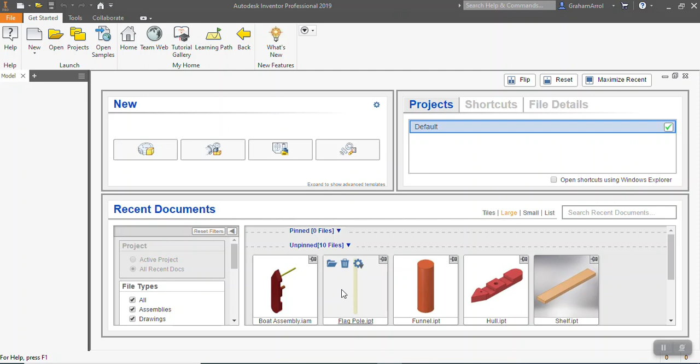So I'm going to start by doing File, New, and as I always do, I make sure that it's selected to Metric, and then I'm going to click on Standard Millimeter Inventor Part File.

Once it opens up, we're going to start a new sketch, and I'm going to use the horizontal work plane here to start my sketch on.

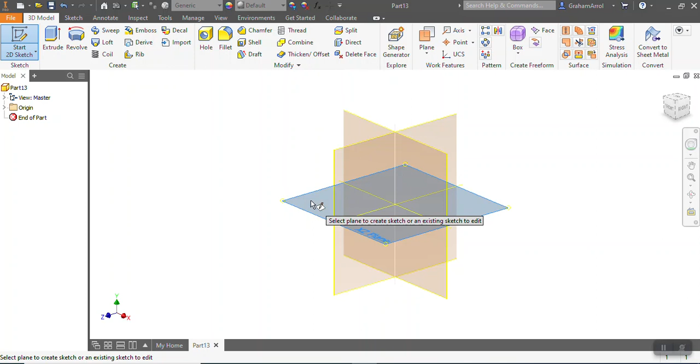The first thing I'm going to do is draw a rectangle. So I'll click to say I want to start the rectangle, then drag my mouse to the finishing point and click again.

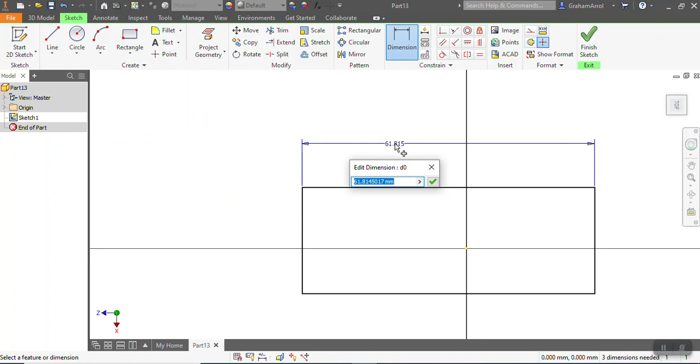Now I'm going to dimension it to the size that I want by using the dimension tab at the top here. I click on the line I want to dimension, and I'll now have a size attached to my cursor. I click again, and type in the size I want, which is 200, and enter.

It'll have zoomed out and made it bigger so you can't see it. With the roller on your mouse, you just roll away from yourself and the model will come back into your screen. I'll dimension the side here, that's meant to be 40, and enter. And that's got the overall sketch done.

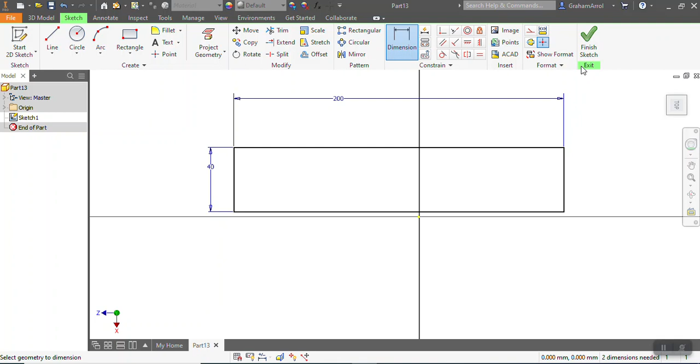As we've always done, once you've got the sketch done, you finish sketch, and then we're going to extrude it to give it a height. So I'm going to click on extrude and give it a height of 20 in the extrude, and OK.

This is like the little block of wood that you were given at the start when we did practical woodwork, and you then made the boat from this. So the first thing we're going to do is try and cut out the two little recesses in the boat.

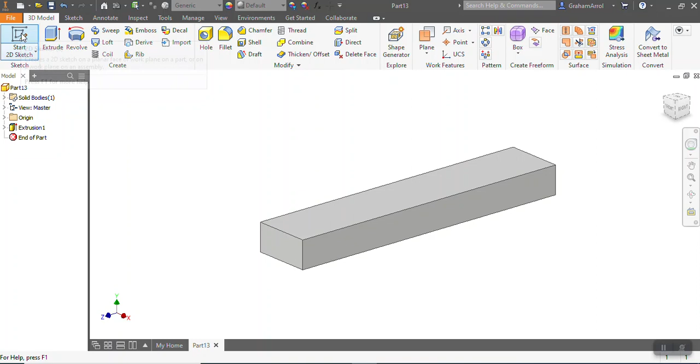I'm going to start a new sketch by clicking on the top surface, and then draw two rectangles. The important thing here is that the rectangles start on the top edge and go down and finish on the bottom edge. I'll do the next one the same way, starting at the top edge and finishing on the bottom edge.

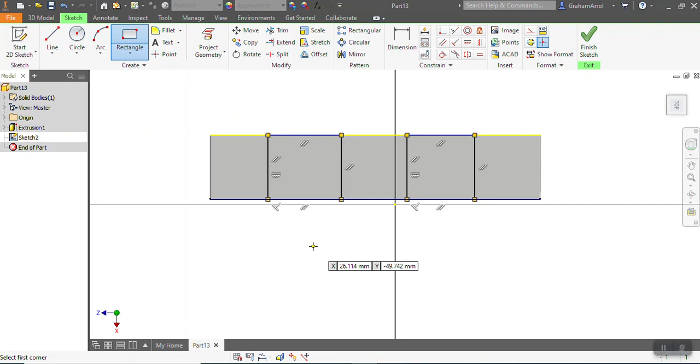Now I'm going to dimension those rectangles. I'll dimension from the front edge by clicking there first, then move to the edge and click again, and I want that distance to be 50. So I'll type in 50, enter.

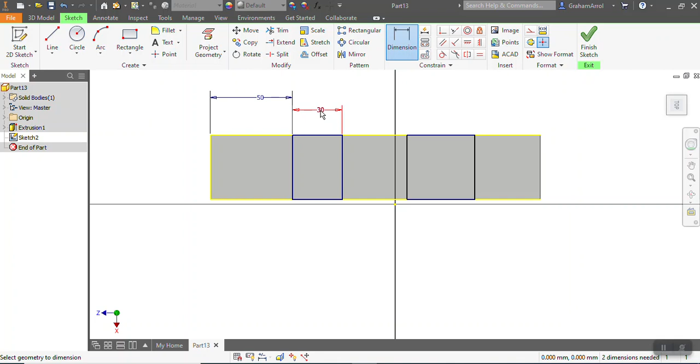Then from the edge to the edge of the first rectangle is going to be 30, enter. And then from the first rectangle to the second is going to be 40, enter. And lastly, the width of the second rectangle is back to being 30, enter.

Once we've done that, we've finished the sketch as usual, and we're going to extrude.

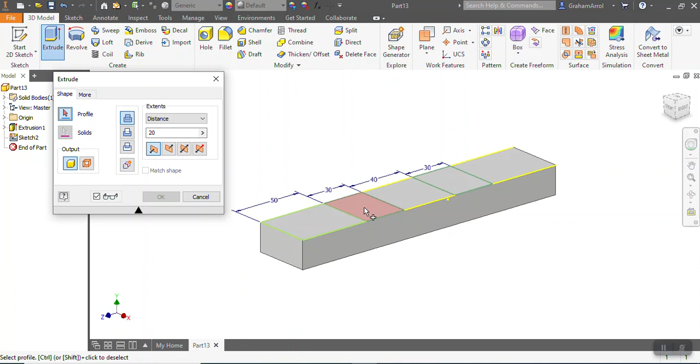Now, first of all, it hasn't selected either of the rectangles. I've actually got to click inside the rectangles to select them. It's trying to join them on at the moment, because this is the join option.

I'm going to do cut instead, which is going to take them away, but I only want to go through halfway, so I'm going to set the distance to 10 and OK. And that's me now got my two recesses into it.

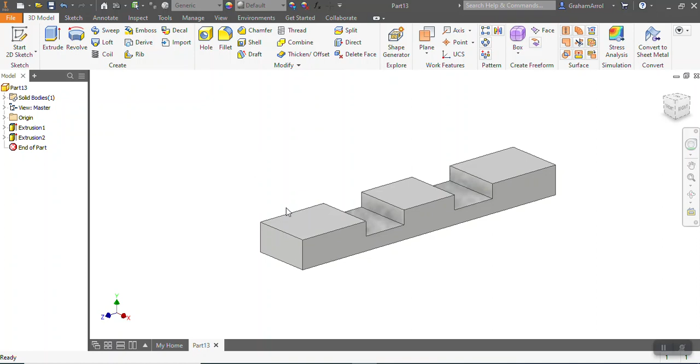So I'm now going to do the front of the boat. Once again, start a sketch on the front of the boat, and I'm going to draw a line starting at the middle on this front edge. As I bring my cursor down, as I get nearer the middle, you should see it goes to a green dot.

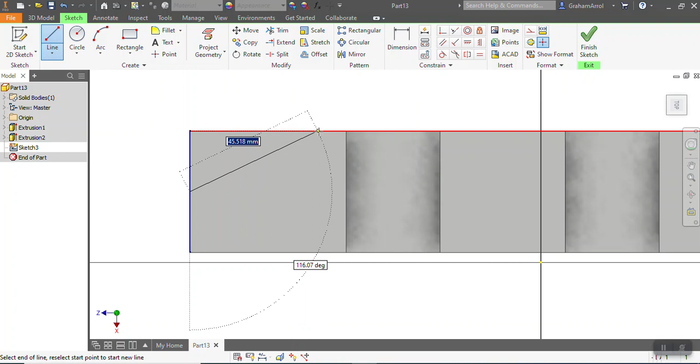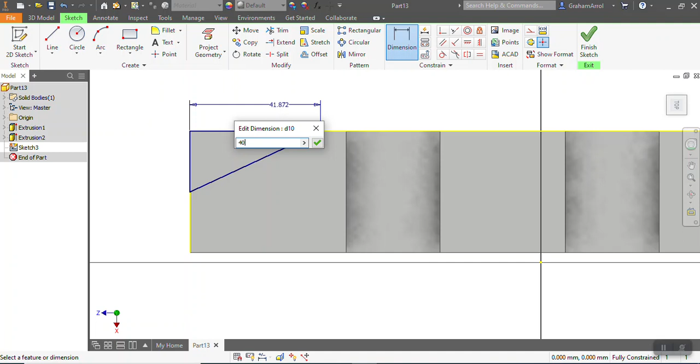That means I'm right in the middle. So if I start there and take it to the outside edge, then repeat the line again from the end of that line to the corner, and repeat the line again from the corner to the starting line, I have a little triangle there. I'm going to dimension from the front edge to the corner and make that 40 millimeters. So that's me getting my first triangle.

I now repeat that for the second one, which I'll do a little bit faster because it's just the same as the first one. Once I've got that fully done, I finish the sketch.

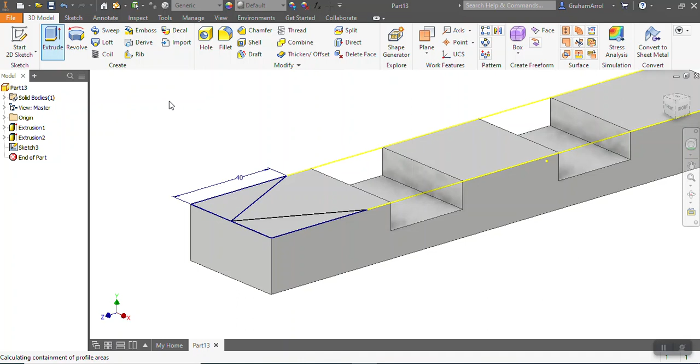So I'm now going to extrude, and I'm going to click on both triangles and cut them away, but this time all the way through, so the distance is 20.

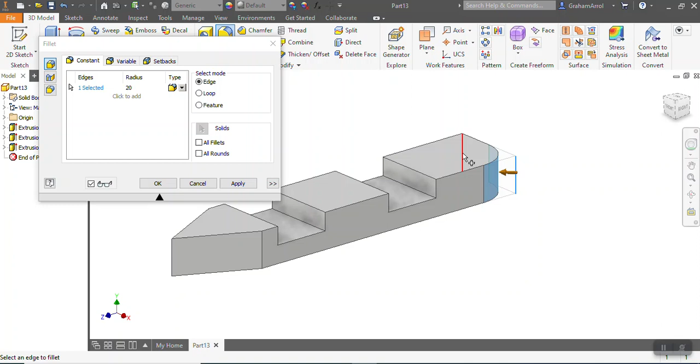So I've now got the main part of the boat done. If you remember, the back of the boat was rounded, and we're going to use the fillet command for that. If I click on fillet, in the menu there's a radius size for the fillet, which I'm going to change to 20. Then I click on two lines, this back edge here, which rounds that corner, and this line here, which is the back edge - you can't quite see it, it goes red - and apply. That has finished that part of the boat.

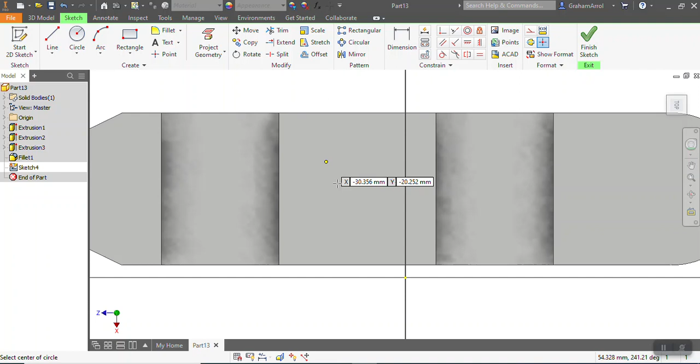So the only thing I've got left is to draw two holes, one for the funnel on this part here, and one for the flagpole on this part here. Start a sketch on this section. I'll start with a circle, size 12, enter, then the dimension from the edge to the centre of the circle is 20, and from the edge here to the centre of the circle is also 20. I finish the sketch and extrude.

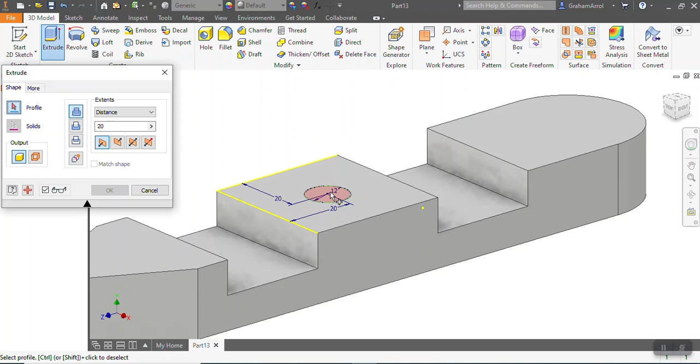I have to select the circle, I want to cut, and this time I'm cutting into it by 10mm. So that's the one for the funnel, and I now repeat that for the flagpole.

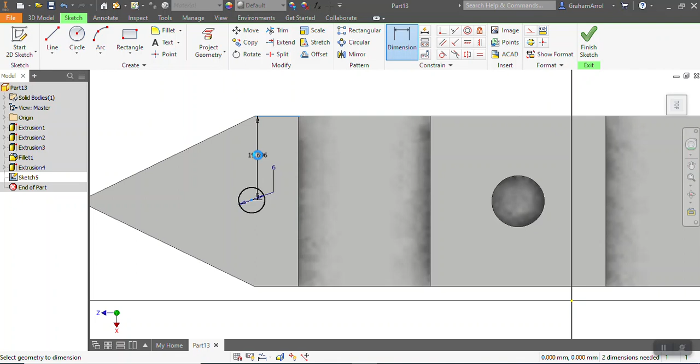So it's somewhere around here, diameter 6. The dimension from the edge to the centre of the hole is 20, and from the edge here to the centre of the hole is going to be 10. Finish the sketch and extrude.

Click inside, cut by 10. That is the hull finished.

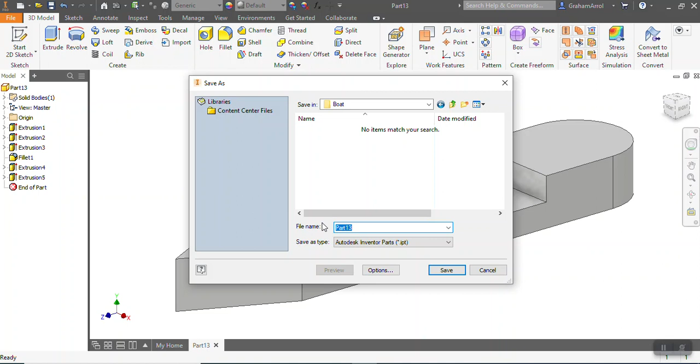So at this point you're going to save. I'm going to go to File, Save As. I'm going to save it into my documents. I've got an Inventor folder here, and I'm going to create a new folder, and I'm going to call it boat. Inside the boat, I'm going to call that part hull. So that's the first part already saved.

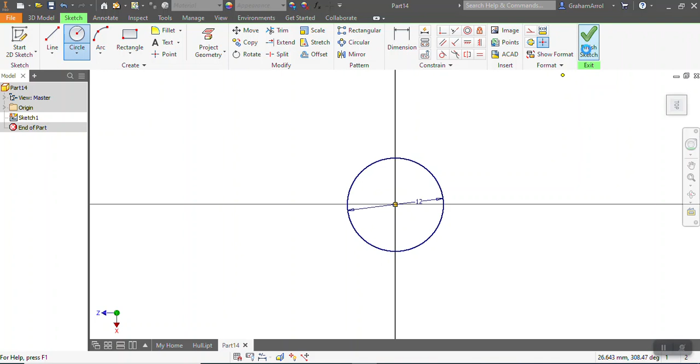Now I'm going to come on to talk about how to make the funnel and the flagpole, because they're very quick. So I do File, New again, Part File. I'm going to start a sketch on the horizontal work plane. This time I'm going to draw a circle. The funnel is 12mm in diameter, so I'll draw a circle diameter 12, finish the sketch and extrude it by 40mm long.

Okay, so that's the funnel made. File, Save As. I'm going to call that funnel. Save.

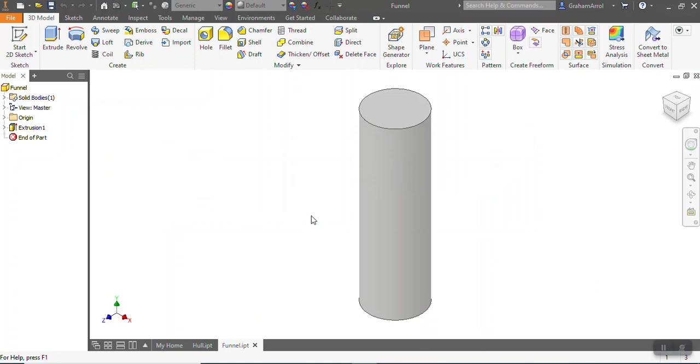And next I'll make the flagpole. So File, New. Same again, start a sketch. I'm going to do the flagpole diameter 6. So 6, enter, finish sketch, and extrude, and the flagpole is 100mm long. So I've extruded it 100mm long.

File, Save As, and I've saved that one as flagpole. Save.

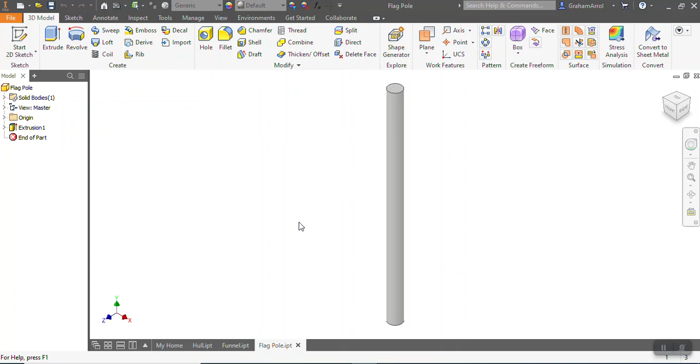Okay, that's a little video on how to make all the different parts. Hopefully that should help you if you have been struggling with that.